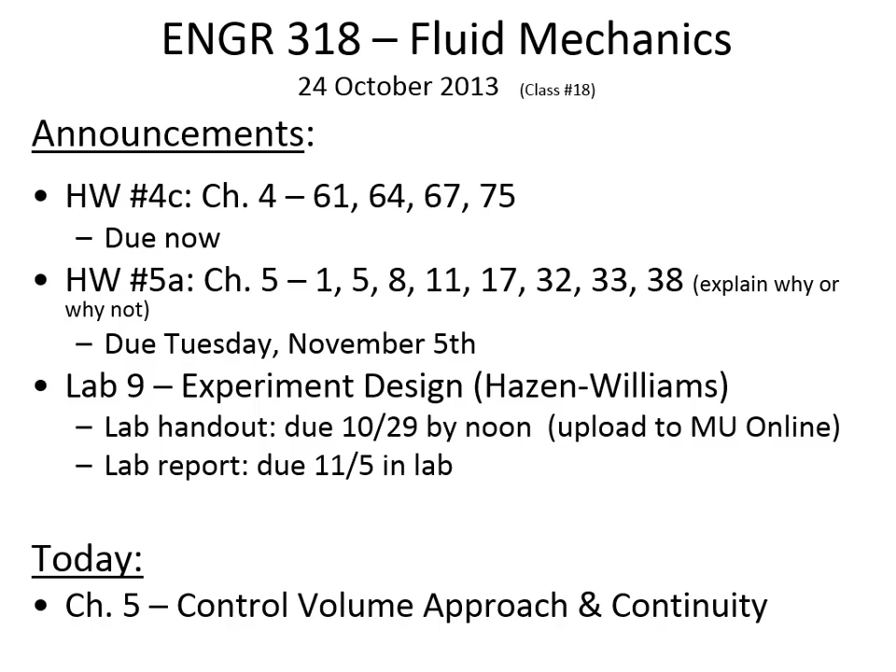All right, just a couple of comments about the lab reports. As I was grading the lab report that you just recently submitted, there were a lot of common issues, and I didn't want to write the same thing over and over again, so I thought we'd take a moment to talk about it here in class. The first thing is when you're preparing a graph with data that you've taken in the lab, let's say you've got 5 data points,

it can be a little bit misleading when you put your numbers into Excel. Let's see, what did we have? Reynolds number and K value. Many of the curves that I saw looked like that. And you don't know, based on looking at the curve, how many data points have been used to define that curve. If it was 1,000 data points and they actually were along that curve, then maybe the curve would be meaningful. But sometimes what Excel will do is imply a curved relationship when really it's just scattered data.

If the actual data looks like this, then who's to say that it actually should be connected with a nice smooth curvature like that? And so to avoid any false representations of what the data is really saying, when you've got very few data points, what I'd suggest is you first of all show the data points.

Have those tick marks there that show where the actual data is, and then connect them with a straight line at most, because that's the most we can say is that the data is connected, and there may not even be a trend in the case of that K value versus Reynolds number.

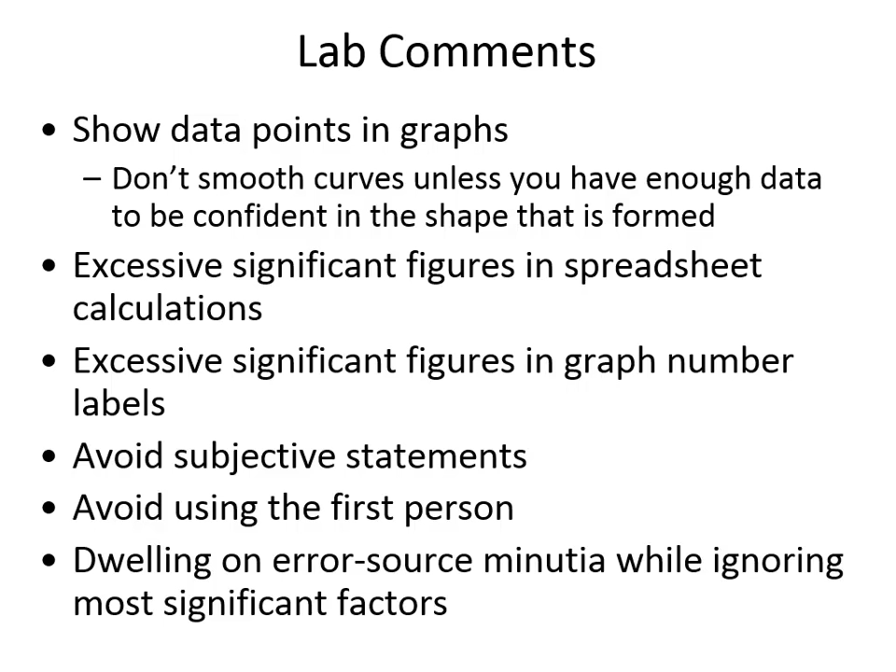All right. Well, today we're going to be talking about the continuity equation. And just to start things off, I wanted to show you a dam and reservoir in South Dakota. It's called the Oahe Dam. And you can tell that it's what was originally a river system that's been artificially dammed. Here's the dam. You can see that straight line there is clearly man-made. It is quite a large reservoir, and it's used to generate electricity.

If we zoom in on the dam itself, there's a couple of ways that water exits the reservoir. First of all, there are release gates here that are used primarily when the flow coming into the reservoir is very high. These release gates are kind of like an emergency measure. The more typical thing is for water to be flowing through the power plant. And there's a tunnel between the intake and the power plant. And so the water is going through turbines that generate electricity. When water goes through these emergency overflow release gates, then electricity isn't being generated.

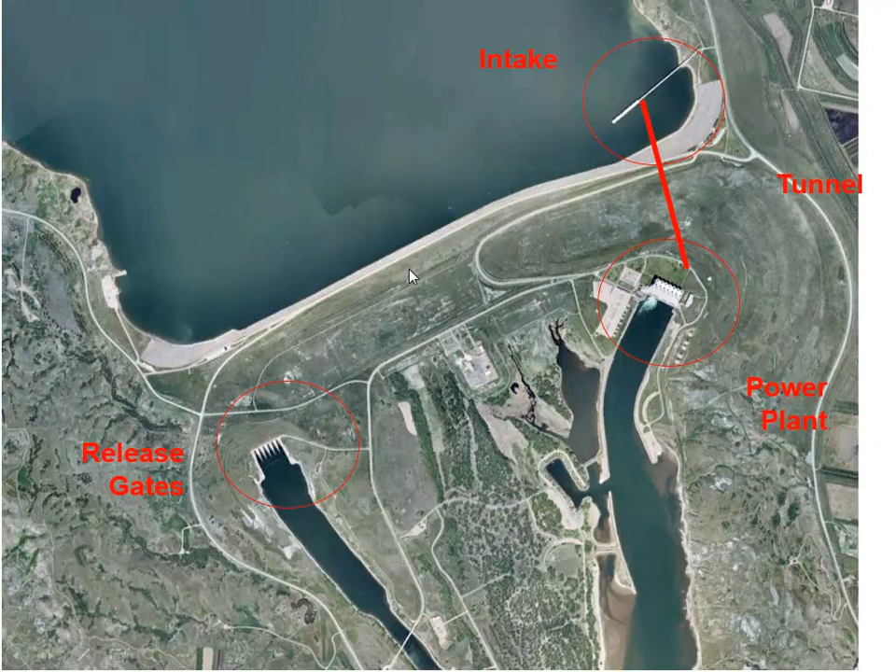They just use those to get water out of the reservoir when the rains are very high upstream, so that water doesn't go over the face of the reservoir. You wouldn't want water just going over the top here. There's no spillway. Sometimes dams have spillways that are intentional so that when the water gets to a certain level, it's okay for water to go over the face of the dam, but in this case, water exits through those two locations. Now, here's another view of the power plant. You can see that there's a series of electrical turbines that are generating power.

It's a relatively low head. There's not a huge elevation difference between the water in the dam and the water in the lake. I mean, compared to the Hoover Dam, which has a huge vertical distance, this is relatively low head. But back in June of 2011, there were some really heavy rains. It was quite wet in North and South Dakota. The watershed that drains into the Oahe Dam was receiving a ton of water.

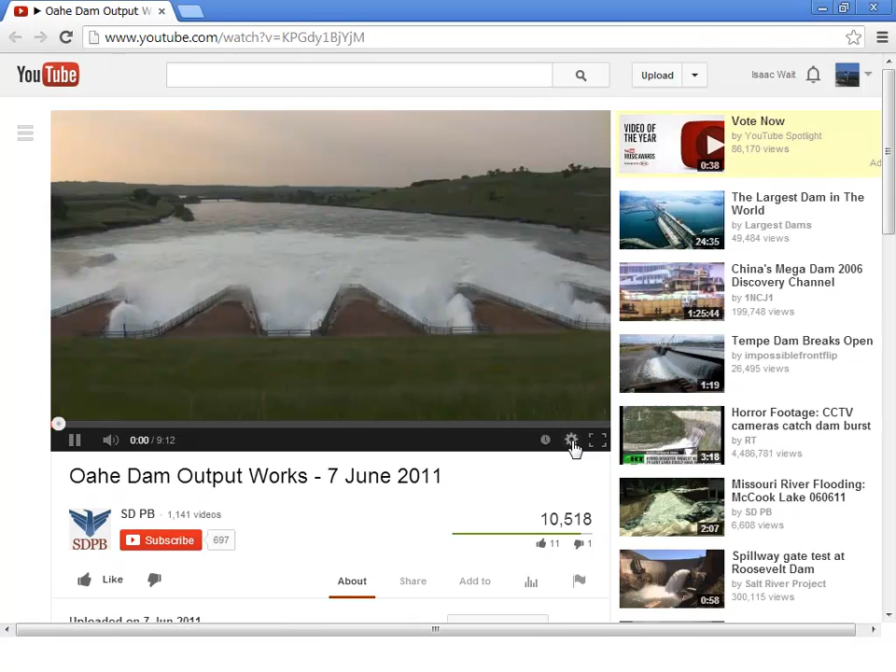And so they had to open up the spillway. They had full capacity going through the power plant, which is approximately 50,000 CFS going through the power plant. And then they had about 110,000 CFS going through the spillway gates. And so first of all, before we calculate the water velocity through those gates, I thought I'd show you a couple of videos related to the situation. Beautiful sight. All that water coming out.

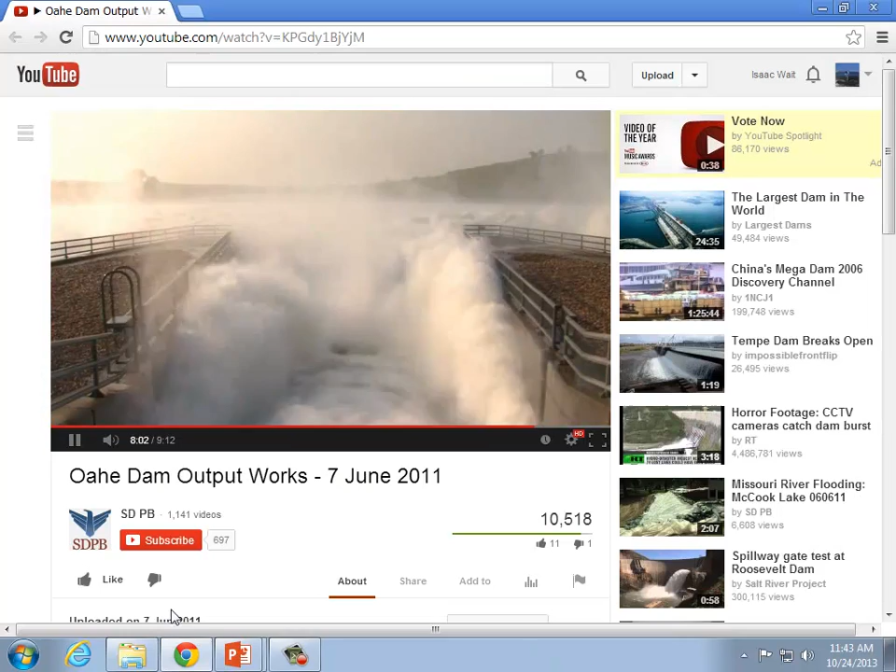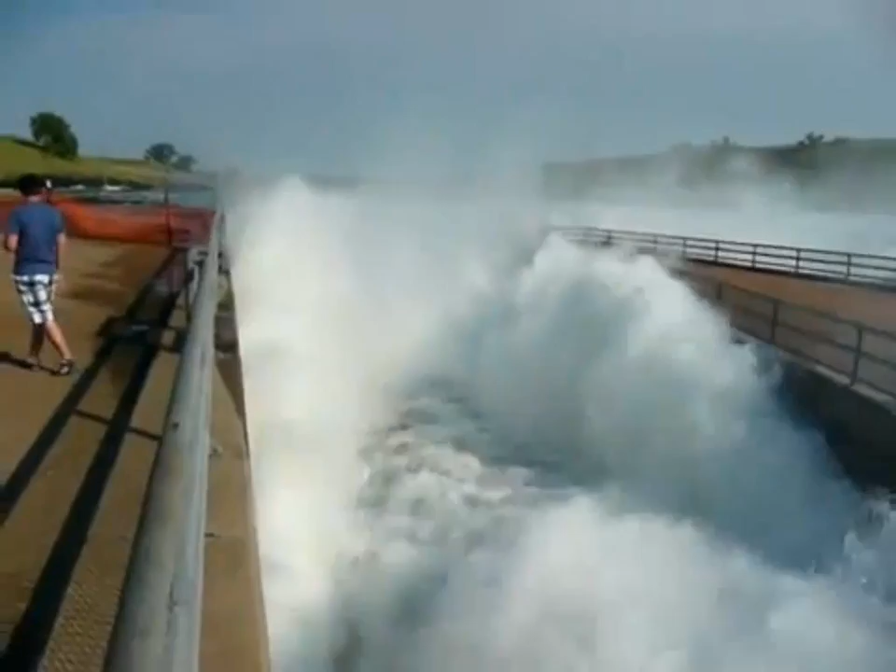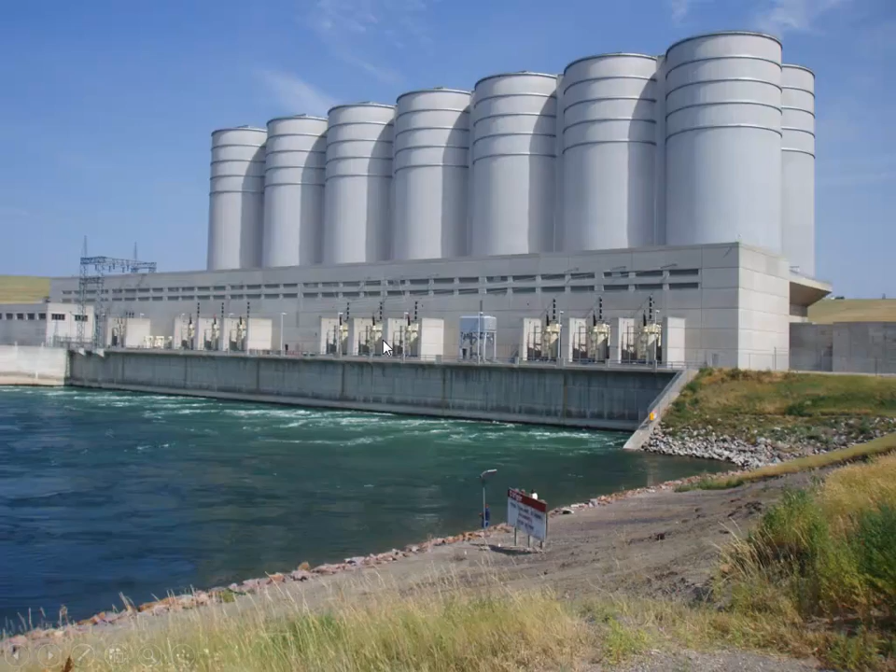And so you wouldn't think that all of that water, that's a ton of water, and it's because it rained a little bit in the watershed upstream. All that water's coming out here because in the watershed that flows into the reservoir, it was raining, the soil was saturated, and so the water flows over the land and through small creeks, fills the reservoir. The reservoir can only go so high before there's a risk of it flowing over the top of the dam. And so that's why they have to do one of these heavy-duty controlled releases.

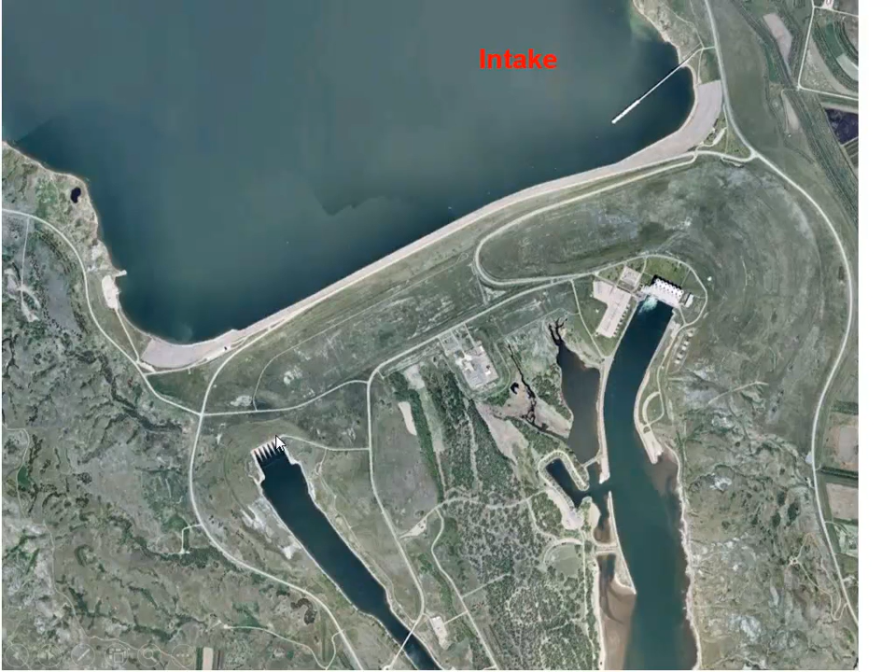What we were looking at was in here. The guy was walking around probably along that railing. Okay, so let's work this example here. And what we're going to be using is the continuity relationship. Start off by finding how much flow is going through each of the release gates. And then, well, let's do it together.

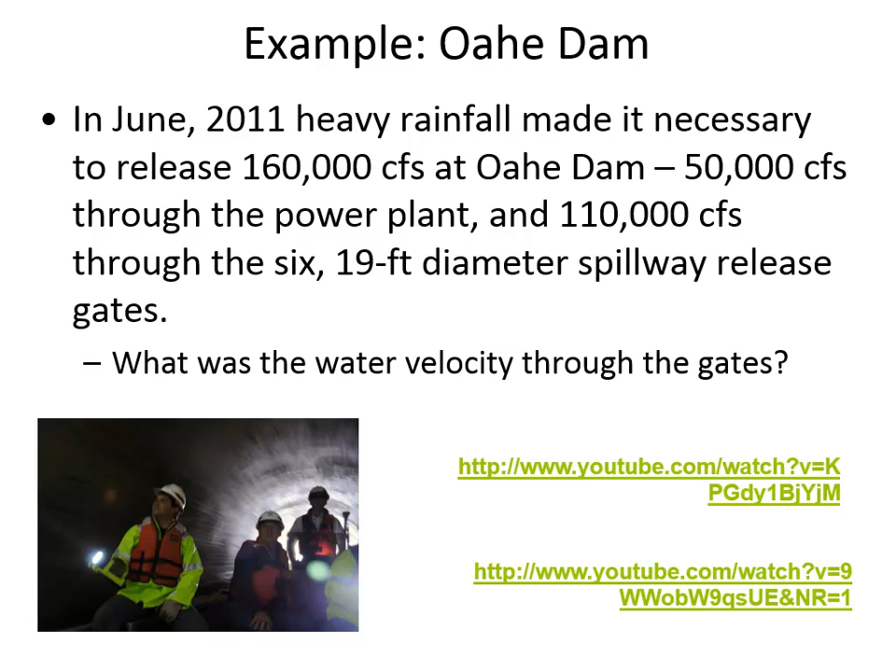We'll get into cavitation a lot more next semester in 331, because cavitation is something that you have to avoid not only in pipelines coming from reservoirs, but also any time you use a pump, there's a risk of cavitation. And so if you think about all of that water going through a pipe, if the pipe starts to scour and erode, then there's a lot of energy being expended there, and things could just fall apart explosively, kind of like they did in the picture of that Russian power plant.

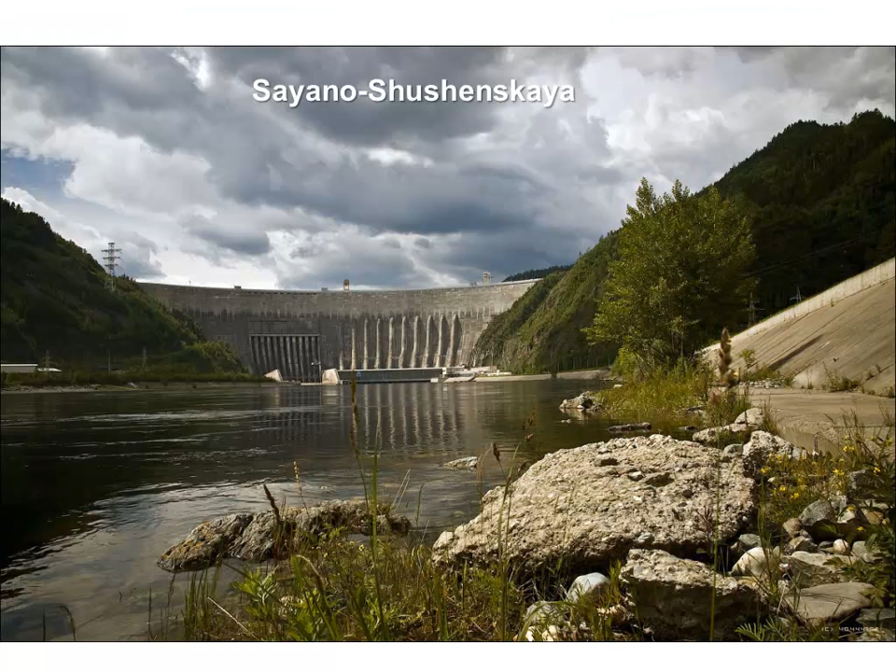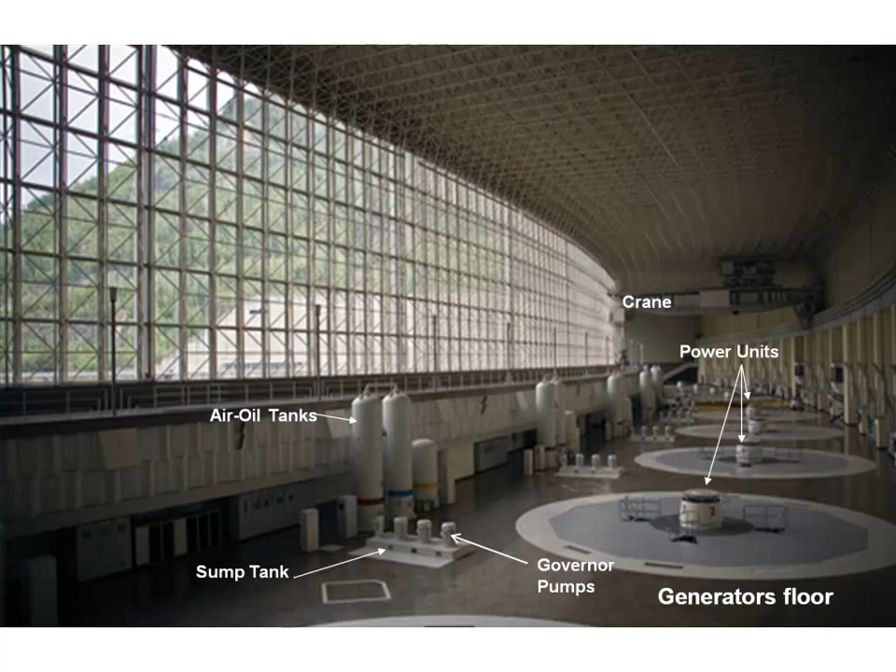And the photo of that Russian power plant makes a lot more sense when you see the flow going from the Oahe Dam. This Russian power plant has a much higher head differential. Look at how tall it is. And so when it failed, the water was going through these penstocks, as they're called. The tubes are called a penstock when it takes water from a reservoir to a stream. And that's how a nice, tidy power plant turned into a heap of scrap: cavitation.

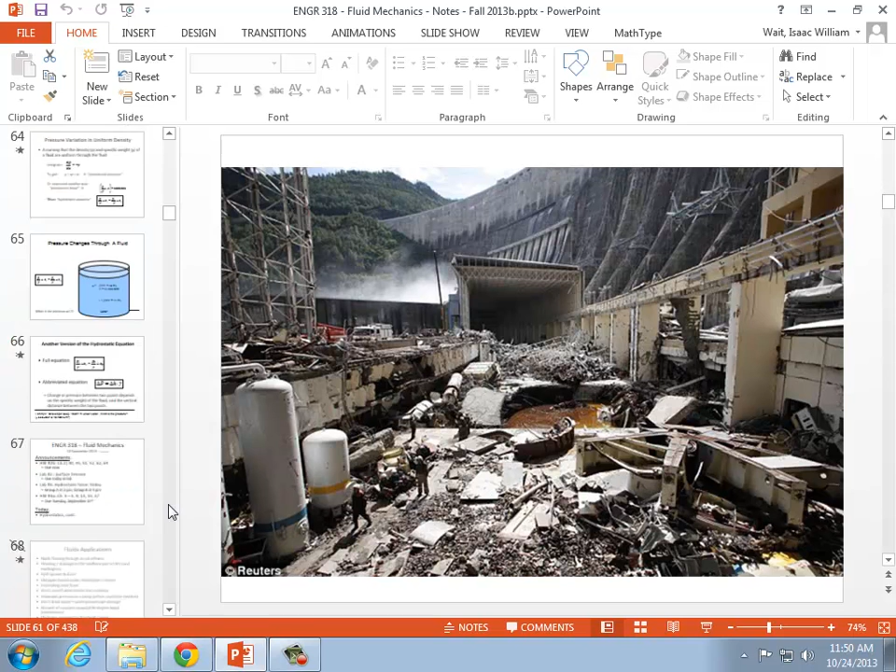Where I left off in following the story was just that they confirmed it was cavitation that caused the incident. I don't know whether they've rebuilt it. I would imagine they probably did, because once you put a dam in, it's there for good. It's, I think, unheard of that they'd abandon a dam. So I ought to check up and see what's the story with that now.

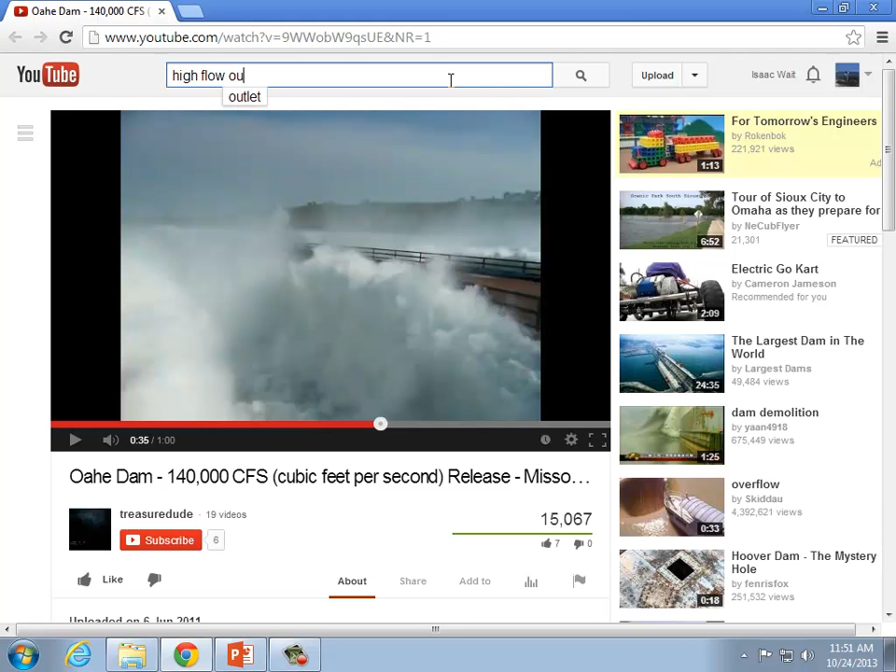The dam in South Dakota, how we saw it, was like splashing over the ditches and everything. It was so sporadic. What is that, just because it's a high velocity rather than just coming out pretty uniformly? That's a good question, because I was looking at videos yesterday, and to contrast that, high flow outlet, let's see, I looked at one, yeah, here it is, high flow experiment.

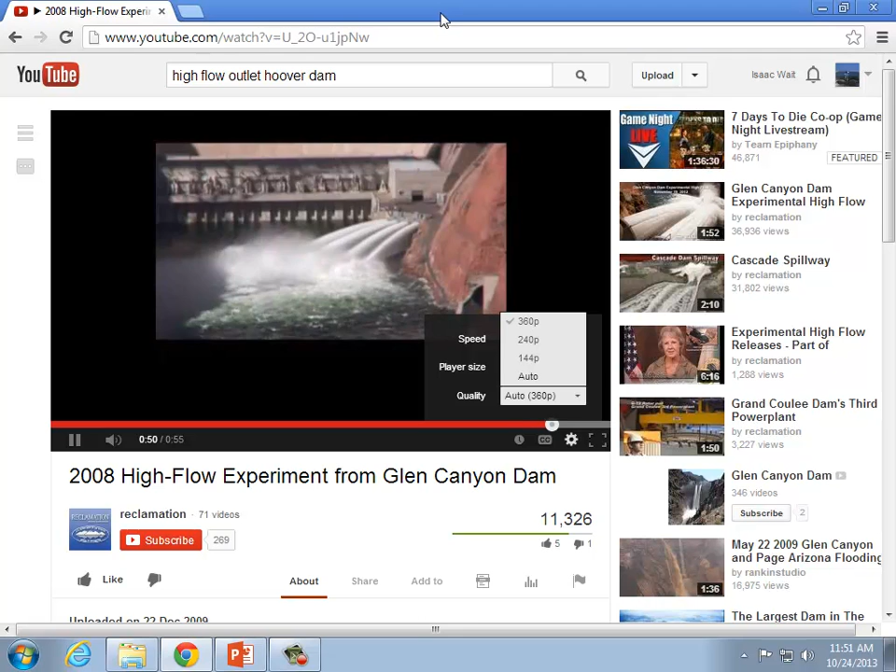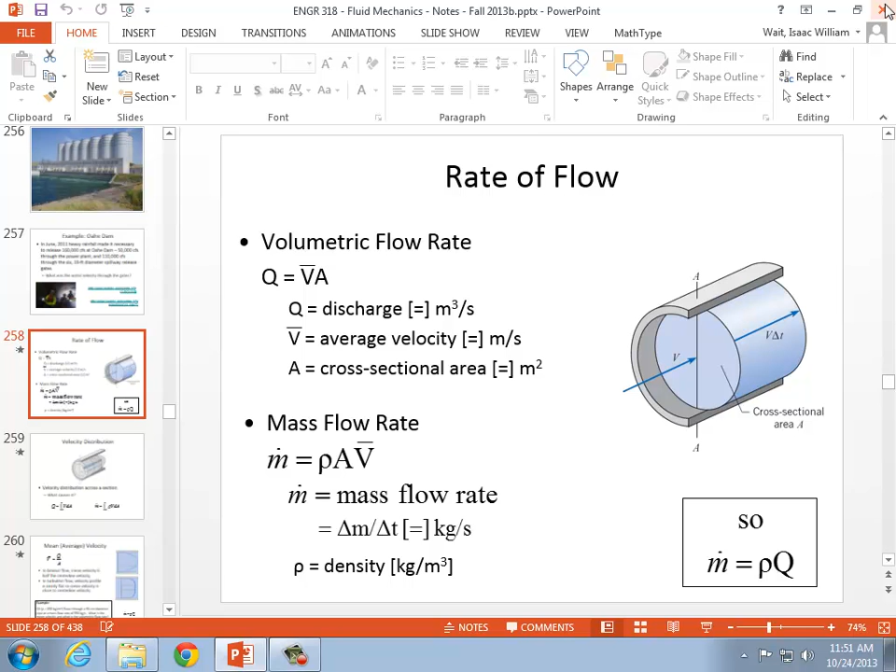Curvature of the pipe, the material of the pipe, how smooth it is. The reason why the water was splashing all over the place was because of turbulence, and there's things that you can do with the pipe to try and guide the flow and have conditions be as minimally turbulent as possible, but it's tough to say precisely why it was splashing so much.

All right, well, here are the fundamental basics behind flow rate. Volumetric flow rate has units of cubic meters per second when we're working in SI, cubic feet per second when we're in traditional units, and the V bar here means average velocity. Although sometimes I'll just write V because I may be sloppy and quick about it, really what I ought to say is V bar, because V bar means the average velocity across the entire pipe's cross-section, whereas V means the velocity at a certain point.

But here in this case, if you measure the flow rate going through the pipe in volumetric terms and then you divide it by the cross-sectional area, then you'll get the average velocity, and vice versa. Here you can see that the element of water is traveling a distance during the time increment delta t. Mass flow rate is the volumetric flow rate times the density. And the units are a little bit different here in mass flow rate.

Instead of cubic meters per second, if you multiply by density, remember density is kilograms per cubic meter. So if you multiply that by the volumetric flow rate, which is cubic meters per second, it'll cancel out the cubic meters, and mass flow rate, which is denoted by m dot, is kg per second. Or if you're working in traditional units, then it would be slugs per second, because slugs is the British gravitational system unit of mass.

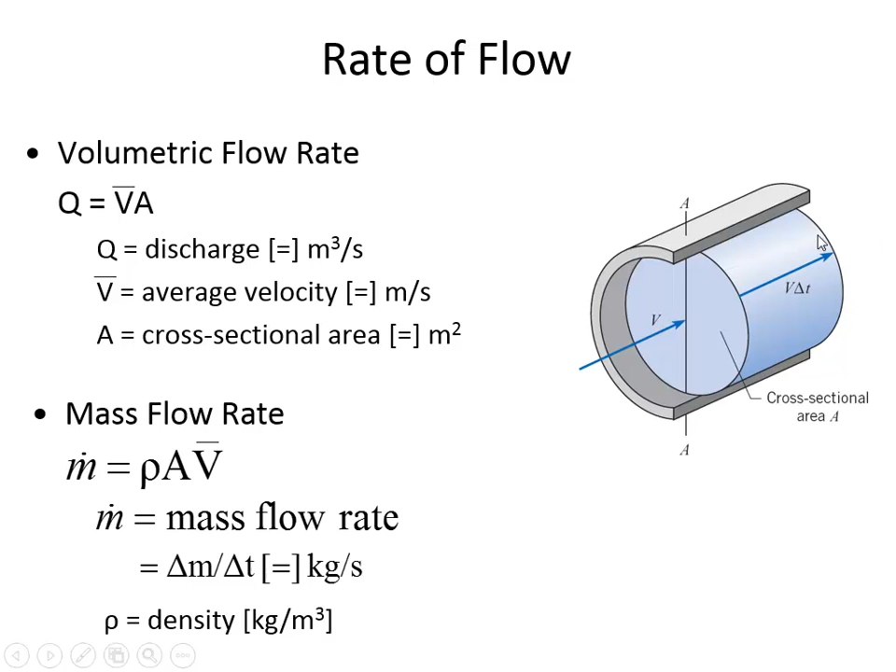And so another way of finding the flow rate is, even if the velocity isn't the same everywhere in the pipe. In this earlier diagram, the velocity was the same everywhere. It was a flat velocity distribution. But you can account for the fact that the velocity isn't the same everywhere in the pipe if you integrate the elemental areas and multiply them by the velocity of each area element, and then take all of the pieces and integrate for the entire cross-sectional area. And so you can find that in terms of volumetric flow rate Q or the mass flow rate.

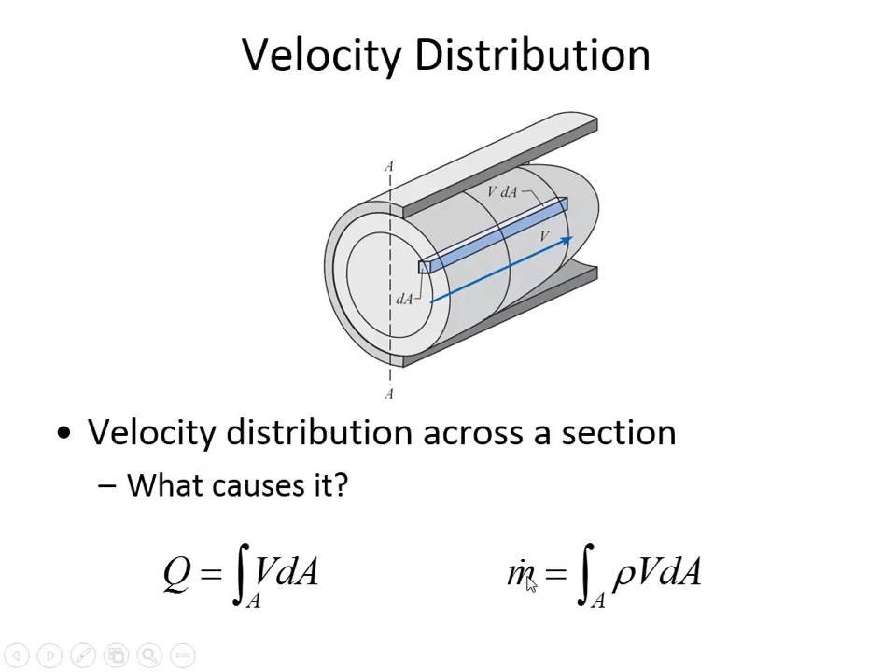And this is showing another look at the velocity profiles. And what we know is that in laminar flow, meaning that the conditions are such that the Reynolds number is less than 2,000, typically what you'll have is a very smooth velocity profile. And the velocity at the center of the pipe is double the average velocity. The average velocity is, if you draw a line through the velocity profile, half of what's under the curve would be to the right of that line, half would be to the left of that line. But in turbulent flow, the average velocity and the velocity at any particular point are very close together.

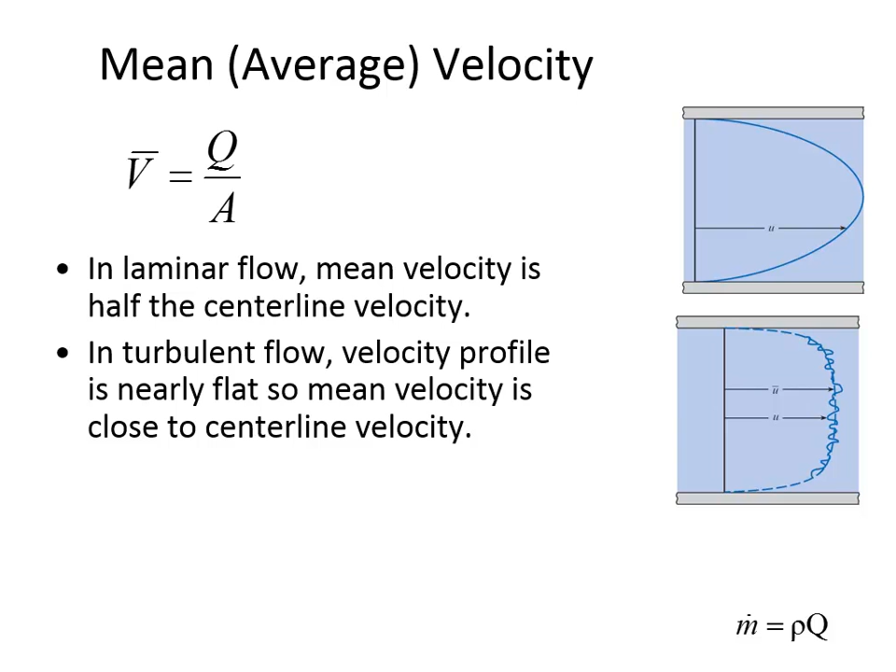And then the volumetric flow rate, we could calculate that one of two ways. We can either just divide the mass flow rate by the density, or since we've already got the velocity, we could get Q equals VA. And so 3.295 meters per second times the area of 0.19635 square meters, 0.647 cubic meters per second. There we go. All right. Any questions on the example?

Probably you put in the specific gravity instead of the density of the oil, I would guess.

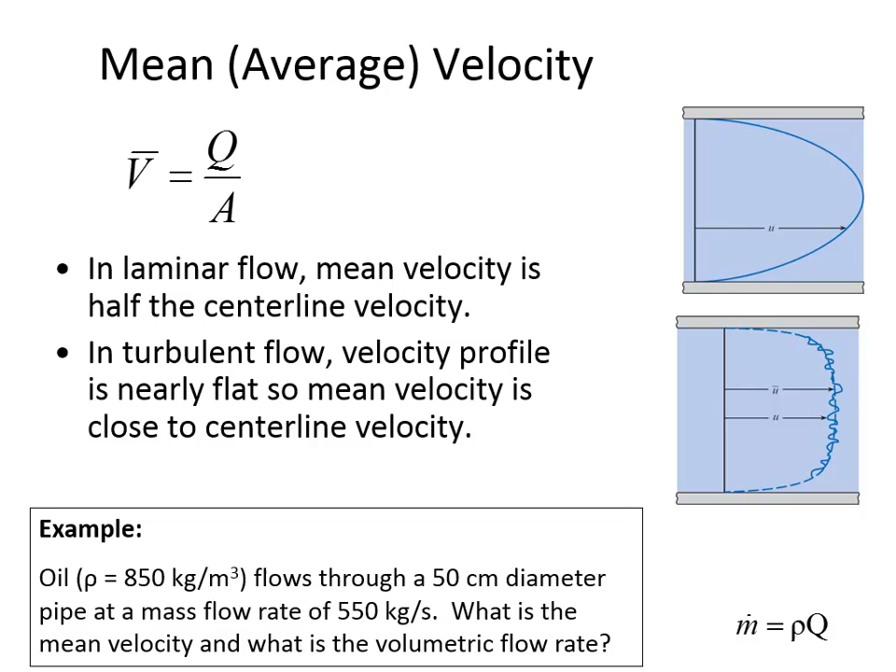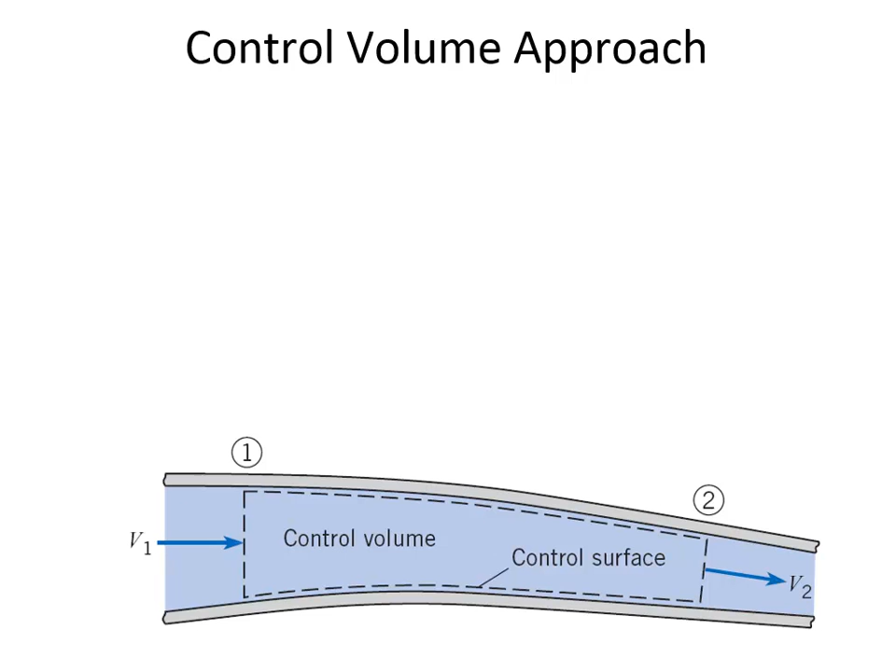All right. There's something in Chapter 5 that's referred to as the control volume approach. And the control volume approach is meant to be a way of keeping track of mass and how it flows in and out of a system. And the abbreviation CV is used throughout several problems and in figures to stand for control volume, and CS stands for control surface. In the control volume approach, a system is defined as a continuously connected mass of particles. It's the same kind of fluid, and it's connected by being in contact with the fluid. The mass of the system is constant. The location of the system can change, but the number of particles that we define as the system remains steady.

The control volume is the area that's enclosed by the control surface, and it's just an imaginary shape. It doesn't actually exist necessarily, although sometimes we'll say we're going to put a control volume around a tank and then keep track of what's inside the tank and what goes in and out.

The idea here is to establish a boundary, and you're performing accounting using that boundary. You want to find out how things move into the boundary, out from the boundary, and then look at what's inside of it and how the mass of the system inside of the control volume changes over time. The control surfaces surround the control volume.

And so here, what's depicted is a pipe with a changing diameter, and you can see a curved surface here, that the control volume is some imaginary boundary that we draw between 2 points, and the purpose of that is to predict what the velocities are going to be.

And so there's a velocity coming in, a velocity going out, and since the control volume is already completely full of the system, meaning that there's only water in here, there's no capacity for additional storage inside of this control volume, any mass of the system that comes into the control volume at 1 is going to cause a certain number of particles to be ejected out of the system at 2.

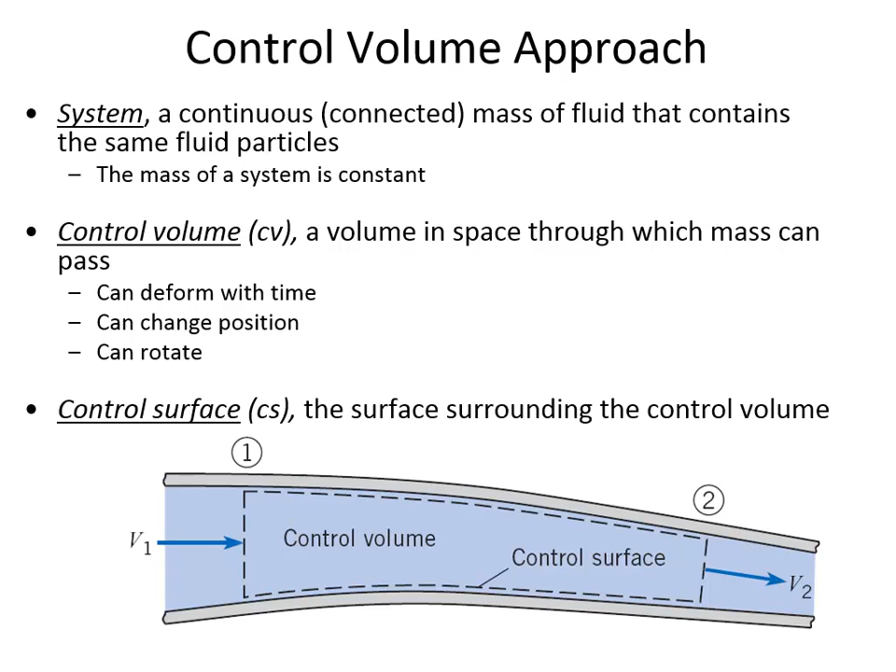You can also apply the control volume approach to a location that does have the potential for storage. Here in a pipe that's already full, there can't be any storage, but in a tank there can be storage. And there's a figure in the text that illustrates the control volume approach graphically. What it does is says control volume is inside of the tank, and consider conditions at time t.

So the options that the water faces as it enters the tank is it can either exit the tank or it can be stored. And so there's probably some sort of a control valve at the exit of the tank that can be opened or closed, and the operator can control the volume of liquid that's stored in the tank by changing how much is allowed to flow out of the tank over time.

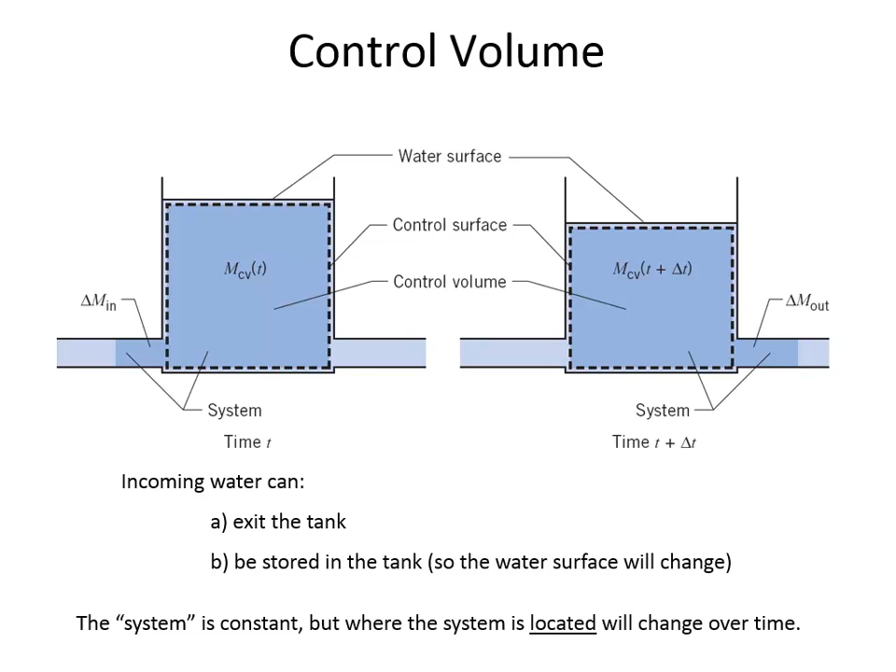Again, the number of particles in the system over time is constant, but it's the location that we're going to keep track of in this control volume approach. The control volume approach says that the mass of particles in the system at time t is the mass that's in the control volume and the mass that is in the inflow. Now this isn't a general law. This is just saying at this particular time the system is in 2 places. There's the liquid that's in the tank and the liquid that's in the inflow.

At this time a little bit later, the liquid that is part of the system is in the tank and there's a certain amount in the outflow. In general though, and this is a general law now, the change of mass in the control volume is in minus out. And it's on a mass basis that we keep track of these things because mass is conserved. It can neither be created nor destroyed.

Sometimes, just out of habit, I'll abbreviate this expression as accumulation is in minus out. Accumulation is in minus out. So what that means is that if you have some sort of a control volume and there's more flowing into the control volume than is flowing out, the accumulation will be positive. That would be a tank with the water level rising. But if out is bigger than in, then the liquid level will be declining because the accumulation is negative in that instance. It's simply just accounting. It's looking at where is the mass and how is it changing over time.

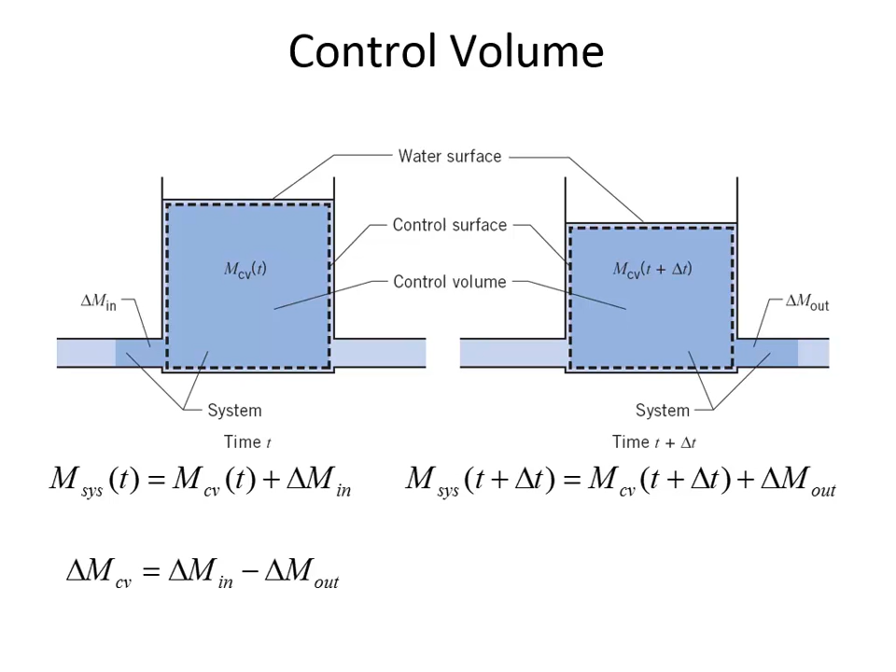And so you multiply the density by the velocity and the cross-sectional area, like we did in this example just a few moments ago. That's the mass flow rate. And the net mass flow rate in versus out is what accounts for change in storage.

So in other words, in the Reynolds transport theorem, if you say we're going to simplify it so that dm/dt is equal to 0, the mass of the system is constant, mass is not being created or destroyed, it's just an ordinary situation, like there's no radioactive decay, just the conservation of mass applies. So if you set dm/dt equal to 0, then what results is the change of mass in the control volume. This is the storage term, or accumulation, is the mass flow rate in minus the mass flow rate out.